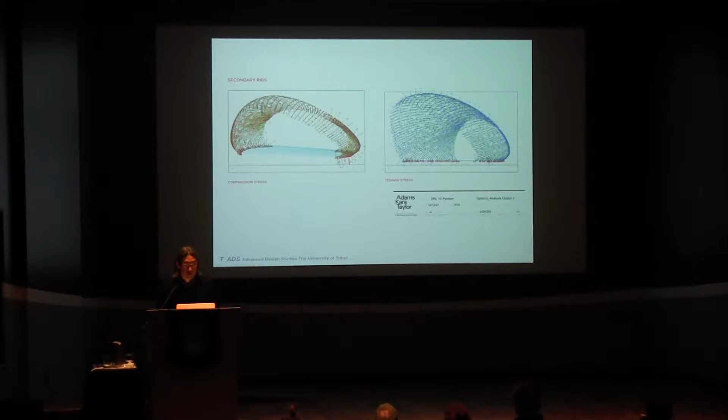In this case, this design was done by a graduate of the AA, and the students were asked to put together this building, or giant model, in about 3 weeks. We also collaborated with a structural engineer, Adams Kara Taylor.

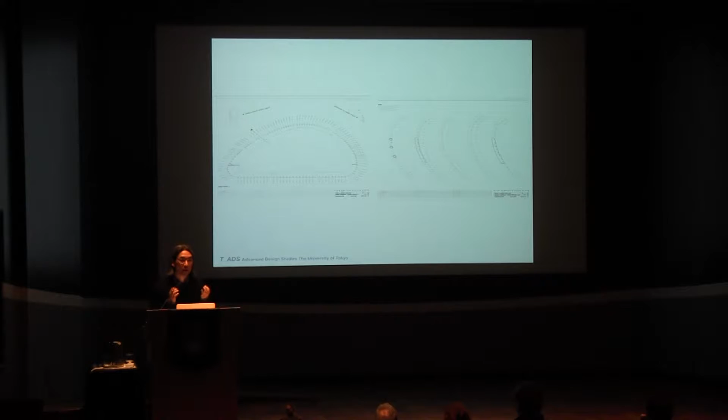Let me just quickly go through. The point is we fabricate and design it just like we're going to make a little tiny model. It works beautifully at model scale, but when students tried to put it together, we thought we could finish in 2 weeks—in fact it took us 3 months.

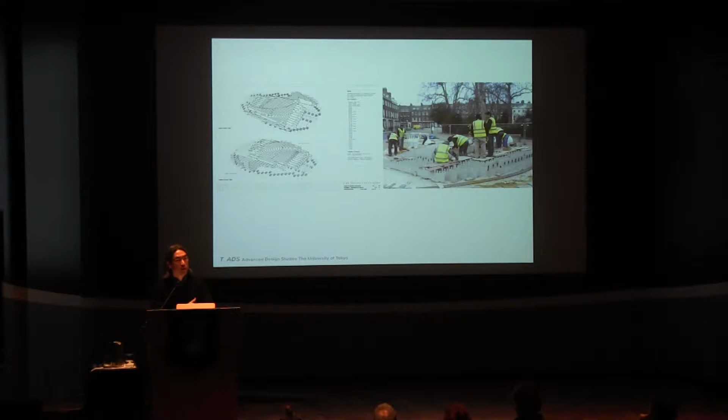In the meantime, students couldn't do anything because it was their spring break. I said, okay, let's put it up during spring break, but it ended up taking a whole semester to put this giant model together. So this is the contrast between the model, which took half a day, and this one.

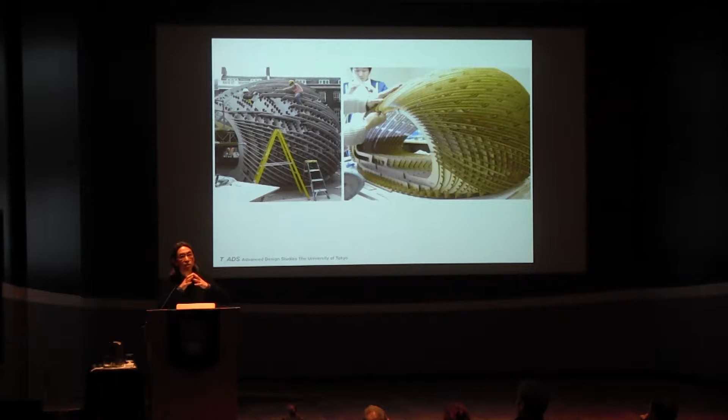So what we learned from this whole possibility of digital fabrication is that it works really well geometrically—you can optimize structure, and it's cost effective because cutting a straight line or a curved line costs the same. But there is a discrepancy between the accuracy of machines and the accuracy of humans. This could be a problem, or it could be an interesting place to work on.

So when I came to Tokyo in 2010, I thought, why don't we use this discrepancy as a point of departure for a series of research? Instead of humans being the ones constantly making mistakes, why don't we develop a system that absorbs all those discrepancies?

The first one I tried was using shrink wrap, like the plastic on drinking bottles with labels—when you heat it, this plastic shrinks. So the material has an ability to adjust for these differences and discrepancies. In this case, it's creating minimal surfaces that also work structurally. Very crude.

The student can build this by hand, but the structure doesn't depend on accuracy of all the parts. Rather, the material has an ability to adjust its size. So you can see the students heating the material to make very taut structures. But the first one was very crude, and there was very little control over the geometry.

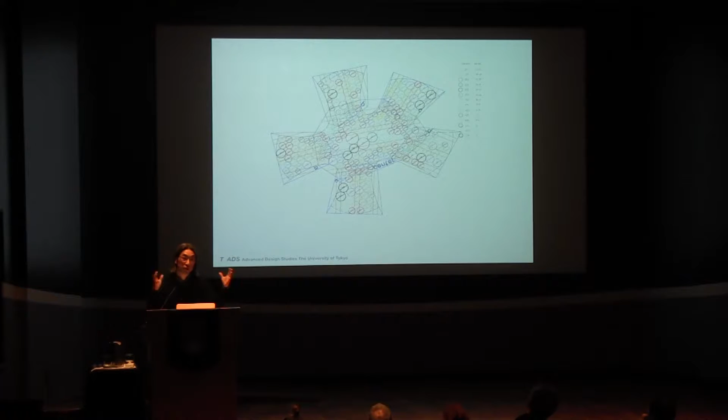So in order to have better control of the output, instead of a giant frame, this time we use a series of circle packs made out of bamboo. In this case, if you want to control the geometry, all you need to do is control the shrinkage. The smaller the shrinkage, or the larger the shrinkage, generates the geometry. So once again, it's about using this loose fit between geometry and accuracy. In this case, the material is the one making all this adjustability possible.

I was talking to Toyo Ito, the architect in Tokyo. He said something very interesting, that he thought more advanced computational use of design makes it easier at the construction site, because everything is perfectly designed and all you have to do is put it together. Perhaps less skilled labor can perform those complex projects because of that support. But in fact, it's completely the other way around. The more computationally advanced the project, the higher skilled laborers are required. So there's an interesting discrepancy here as well.

So with that, this is the first project I worked on together with a construction company, Obayashi Corporation. I made a pitch with this construction company because they're facing a situation in Japan where the population aged over 60 will be about 40% in about 10 years.

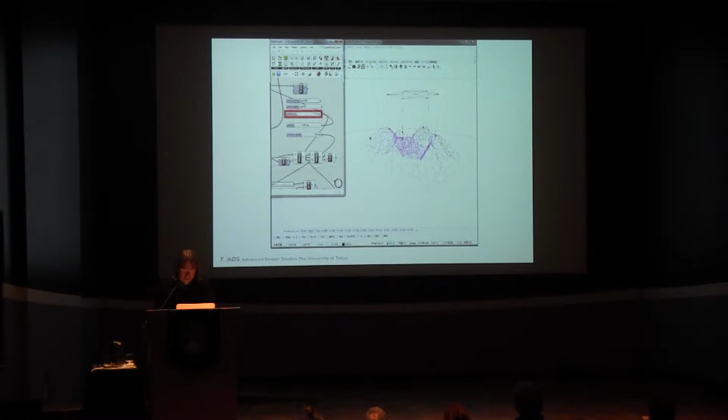Let me quickly go through these as well. In order to test it, this is a 1 to 5 scale model within our laboratory. All of it could be collapsed, brought to the site, and then lifted finally with this crane. A very simple kind of stitching of these seams allows the geometry to be very stable.

This also requires very precise lengths of these components put together by a series of cables. So once again, everything is quite manual, but the manual labor is being supported by digital fabrication. In this case, it's creating a jig, from the diagram and the fabrication processes.

These are dynamic systems where we have to make the structure - once again, the strength is not based on the material, but based on the geometry. So all the dynamic forces needed to be calculated. I'll skip that. So, as I was talking about, the geometry pulling down towards the middle allows all those components to be balanced and become quite stable in the end.

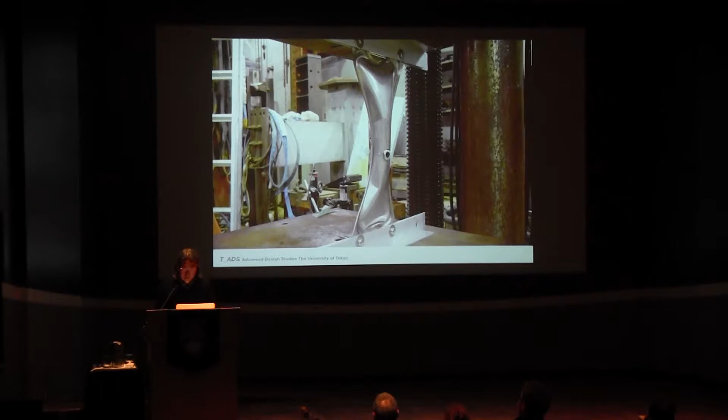Some of the structural calculations, working together with the structural engineer, Jun Sato, who does most of his work for young upcoming architects. Within our structural lab, we had to crush many of those. It's very thin, as I said, very thin stainless steel, but when you inflate it, it becomes like a pillow that becomes a compressive element. Here's a video showing the fabrication and assembly processes.

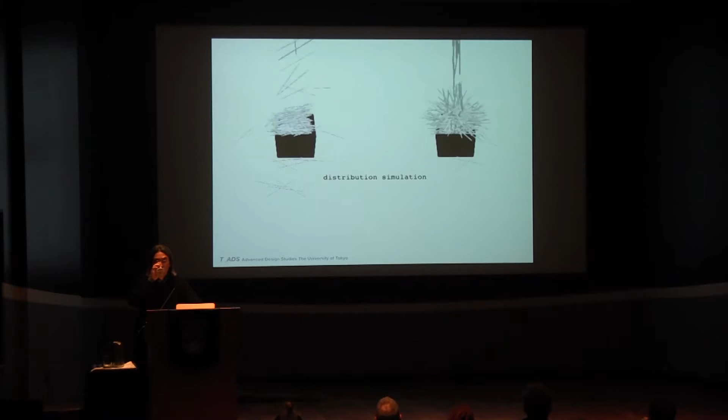The basic component for the system is a simple stick with a square section. However, by controlling the way these sticks are distributed in large quantity, we can observe emergent logic in the way they form structures.

We have found that the structure does not have a specific breaking point. It distributes a series of local failures while remaining intact as a whole. The scanning system monitors the stick structure, sending data to the network, which is compared to the digital target geometry in real time. The network then feeds back to each distribution node, acting as a guiding system, allowing stick dispensers to work collaboratively to function as a single large 3D printer.

So instead we take everything out - we thought, why don't we develop this feedback in the real-time scanning system so that when people make a mistake, it's not a mistake, but it just needs to be recalculated for the new targeted geometry. The new target geometry also needs to be rescanned with the structural analysis. So these are the kind of monitoring to see how the geometry is constantly changing, but the mistakes are always being adjusted within analysis of the structural development.

We saw that in the video. It's an interesting thing - this professor was wondering how do you make a strong and safe building, but at the same time it doesn't have so much weight. Because in Japan, in order to make a safe building, you have to make a span of concrete, and it oftentimes becomes very heavy. But when the failure of those buildings happens, the disaster is multiplied. So lighter buildings perhaps have less potential for disaster consequence. So he's developing this whole idea of a porous, lightweight structure that's very strong, and chopsticks seem to be, at this point, the right answer.

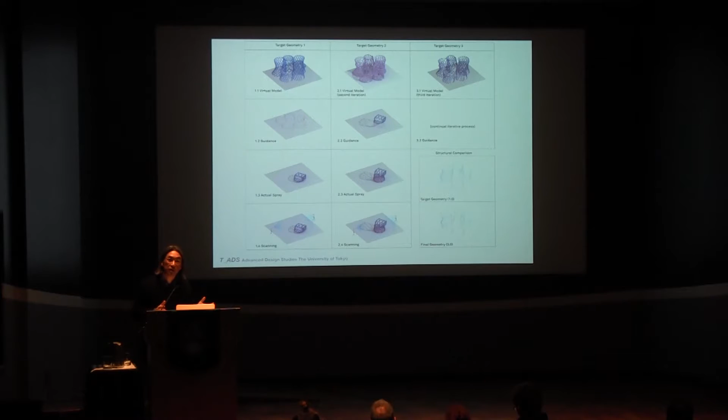And the final geometry is close enough. Structurally sound, everything is fine, but slightly different. Is that a bad thing, or is that a positive thing? So we thought it was a positive thing that we can differentiate each time we make.

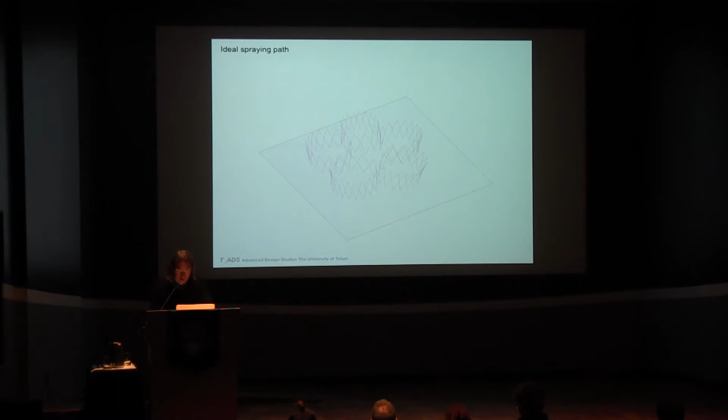So this is a quick sequence. Here's an idealized spray path. Of course, the student makes it slightly different. So we scan it, correct it.

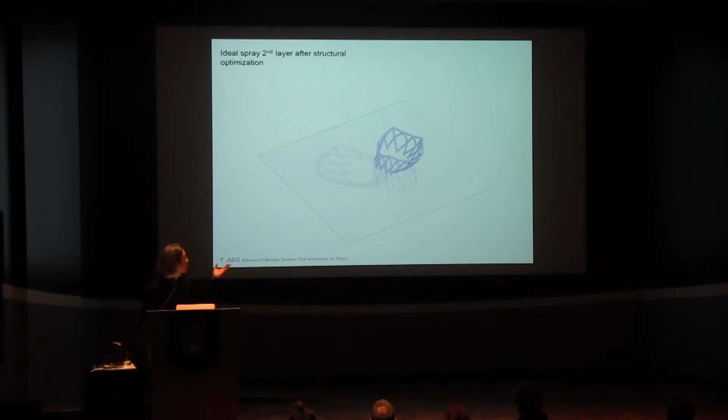And then because this time we learned that in Japan, over 2 meters above, you have to have a license to do a construction process, students are always working on the ground, and if they have to go up, we have to hire a contractor to do it. So in this case, we reversed it to say, why don't we use a light material? This is another reason that we chose the spray foam.

But we built on the ground and lift it up, so that we can constantly work on the ground, but that would create some more inaccuracy in the process because you have to lift it up each time.

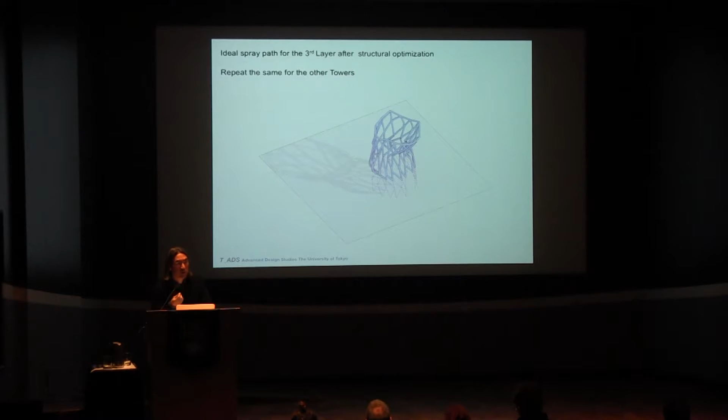So this is the left, on your left, that's the targeted geometry, and the right, that's what we printed through the movement arm of the student. And the structural analysis, as I said, doesn't happen before or after, but throughout the entire process is continual scanning and also analysis taking place.

So here's some snapshot from the night view. I'll show you the video once again of this whole construction process.

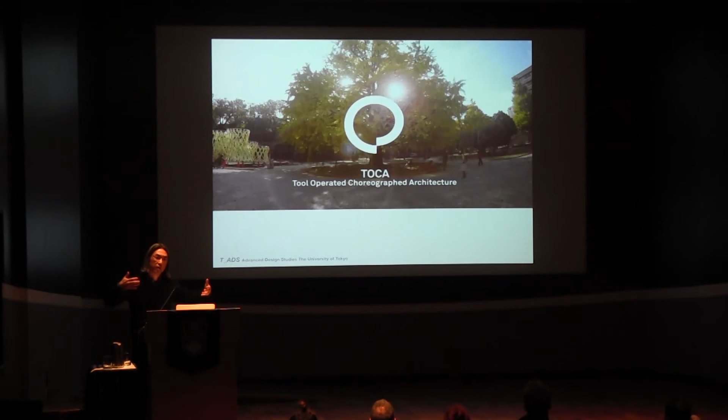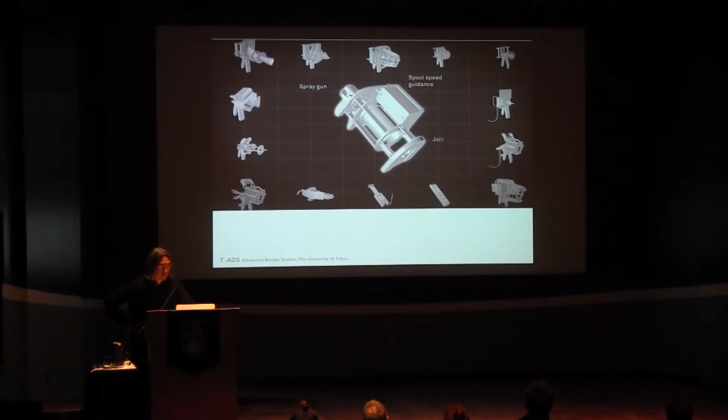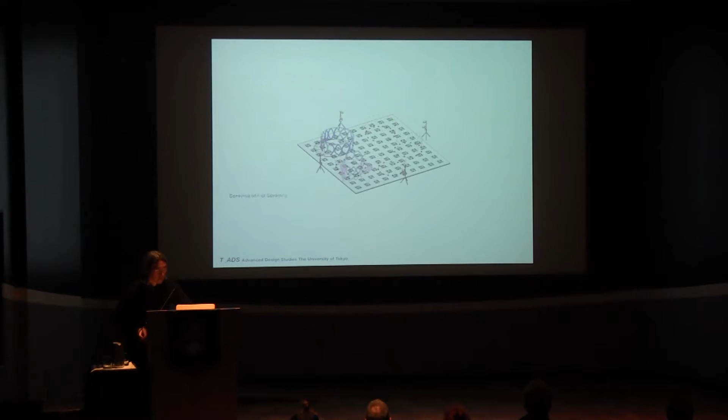It's a TOCA, because we thought, how do you make a construction process like a dance, right? The person comes together in the print. This time, instead of projection, we use a QR code so we can see during the day. It wasn't as smooth as what we imagined, as you can see.

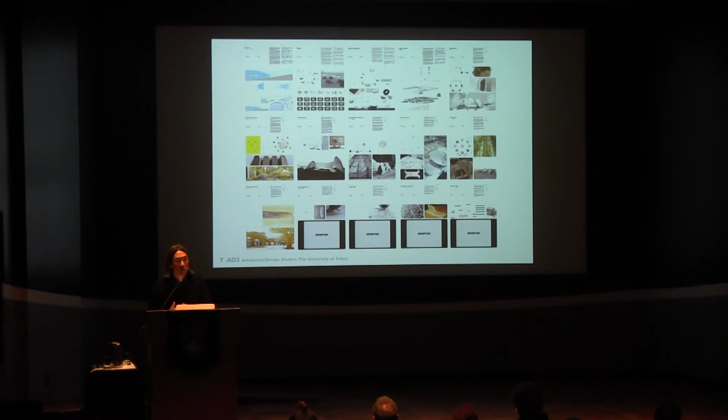So we explore whole different ideas - materials that are not considered architectural materials. I'm going to show you some samples, like wasted coffee ground, or paper which is perhaps more known for recycling, but not architecturally, or something like hair. When you go to beauty salons or barbershops and get a haircut, what are you going to do with the hair if it doesn't have any architectural possibility? So students are wandering around to see how we rethink about material and how we maximize the material available in the city, where materials are being produced rather than only consumed.

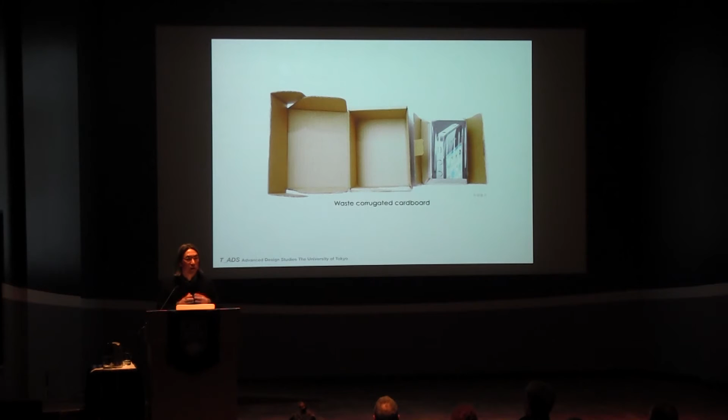Quickly going through, this is called digestive architecture. Internet economy really produces a new type of material distribution, and the output of this is cardboard - you buy something on Amazon, there's a box within a box within a box, you always get cardboard all the time. And this is actually a Canadian study - students are looking at cardboard as something the city produces all the time. Can we do something without turning that into toilet paper?

In Ontario's Agriculture Department, they studied that cardboard can be replaced for cow feed - as long as 40% nutrients are provided in addition to the cardboard, the cow can sustain perfectly healthy. And we thought, what a great idea, that we can turn the cows into this whole material transformation process.

Architecture in this case happens not only from cardboard back to raw material and then ending up as toilet paper. Here it's a tree that provides the material, but instead of going through an industrial process, it goes through an agricultural process. The cardboard is used as feed for cows, but what a cow produces is cow dung. You can turn the cow dung into fertilizer, but there are enriched fibers in it that we can turn into brick, and the brick becomes architectural material. If you don't fire it, it becomes raw material again.

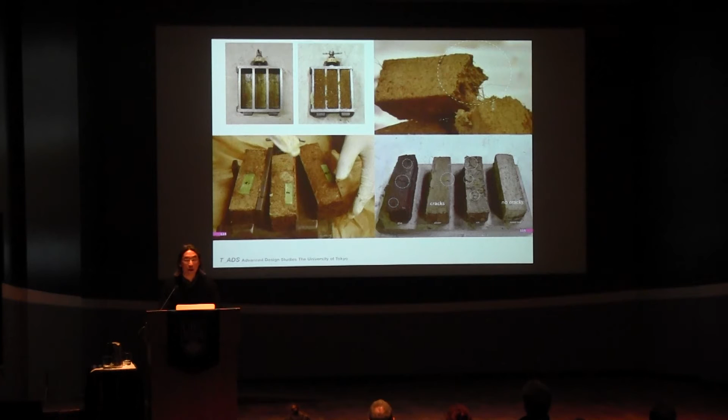So you can produce this material cycle: from cardboard to feed for the cow, and the cow produces an architectural building material that you can use for making temporary buildings, and in the end you bring it back to the farmland where it becomes fertilizer again. So the students actually got cow dung and made their own brick, testing how much fiber it needs in order for it to become a sustainable product.

So you can imagine what our studio smelled like.

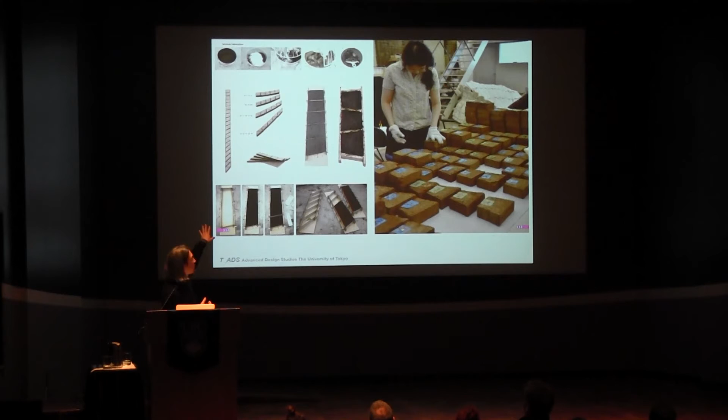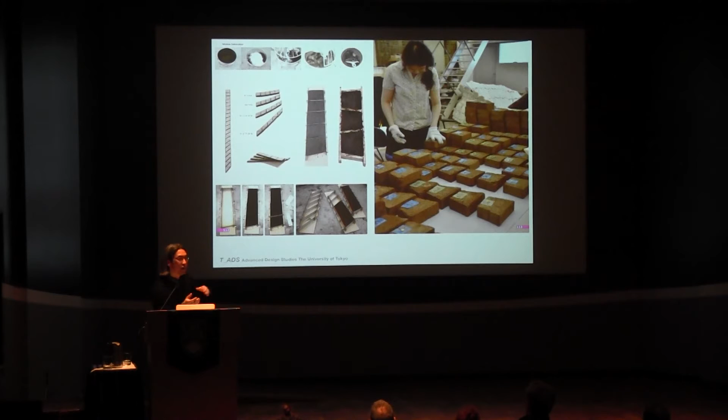What you're looking at on the left is what they do in the first year. It's about whole geometry, how to put together different types of material through one single production process that produces various different components. Depending on how you put it together, you can control the outcome. It's a kind of reverse engineering: you want a particular output, find the curvatures, and stack them in a puzzle in order to create some geometry in the end.

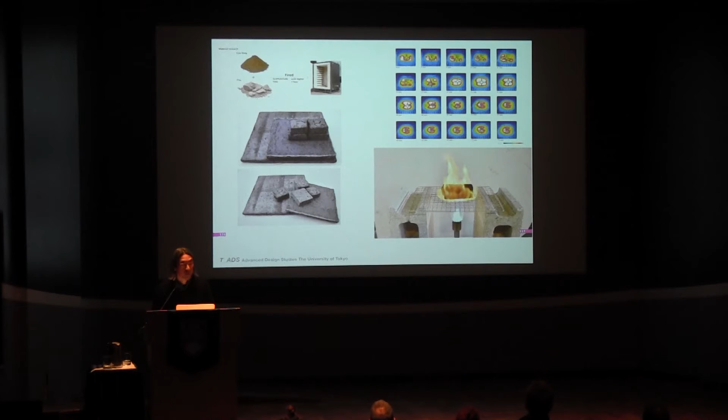Or if you fire it, it becomes something used in places like India and elsewhere as fuel for kitchens. So it's not only about going to fertilizer, but you can also turn it into potential emergency fuel. These are the kinds of things they do in the first year as a geometry study, but the geometries are also tied back together with the material system.

In this case, it's how the city produces a particular material that works in a larger agricultural as well as urban system. The final proposal for the student was to create a farmer's market used only in the summertime, where all the material from the cow dung is used, then goes back to the farmland in the wintertime, and the cycle produces again.

This is another project. Typically cities are quite polluted, and the more construction takes place, the more toxicated or polluted the city gets. So how do you reverse this concept, so that perhaps the more buildings that are built, the healthier the soil and the healthier the ground will be? Is that possible?

This project generates a brick from material at a gas station. In Japan, gas stations have a maximum license of around 25 or 30 years, and in order for the license to be renewed, they have to take all the soil out, clean it up, and put it back in before running the gas station again. Nobody does it because it's too expensive—typically they just put the soil back and put the building on, and nobody knows what it was before.

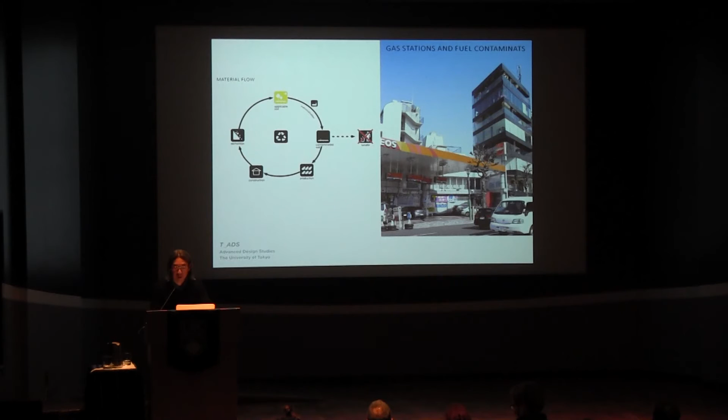Once again, these are student projects that generate a geometrical system while also dealing with a city issue—in this case, how to deal with polluted ground. Similarly, the geometries are put together in a very simple way, but they're all differentiated. If you put them together in a certain way, you can control a particular outcome.

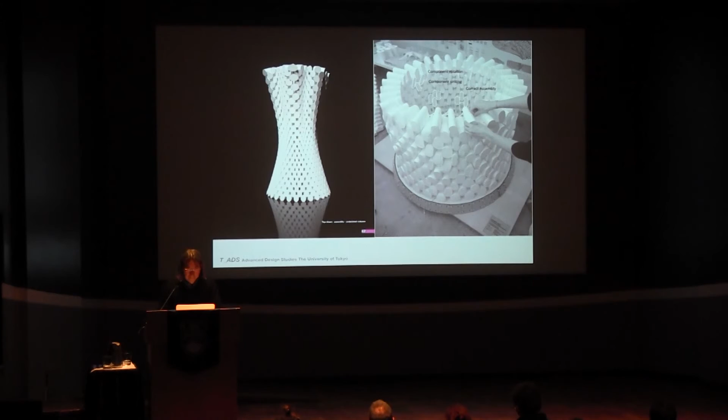So those are the geometries they can produce, also the system.

The proposal is to work at a construction site, let's say a post-gas station construction site. They dig out all the soil, pack it into a series of trapezoid-shaped bricks, and create a pavilion. Meanwhile, the pavilion will detox the soil, if you like. After half a year, the soil becomes clean, and you can put that soil back in, basically demolish the building and put it back. So the architecture exists within this material transformation process rather than architecture always being an end means.

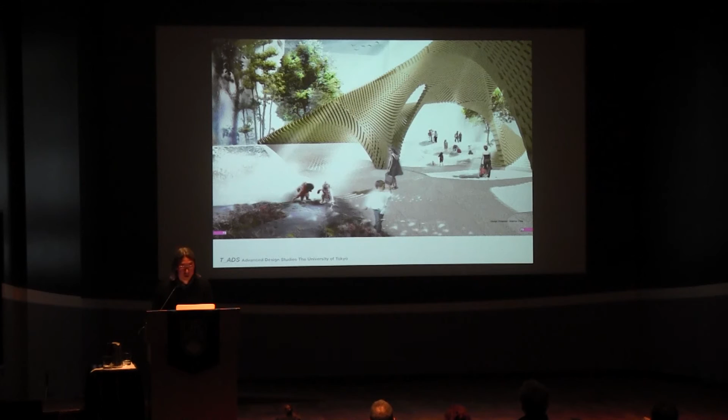So here's some of the proposal. Now, the last images I wanted to show is this idea—a bit of a radical one. We didn't even know what to do with it at the very beginning.

Coffee grounds—everybody drinks coffee, but we don't think twice about the potential of coffee ground. It has incredible properties: it's fire resistant, it absorbs odor, produces aroma, and repels mosquitoes. Can you actually network all the coffee shops in Japan, in Tokyo, to collect it all and produce an architectural building material? That's what the student tried to do.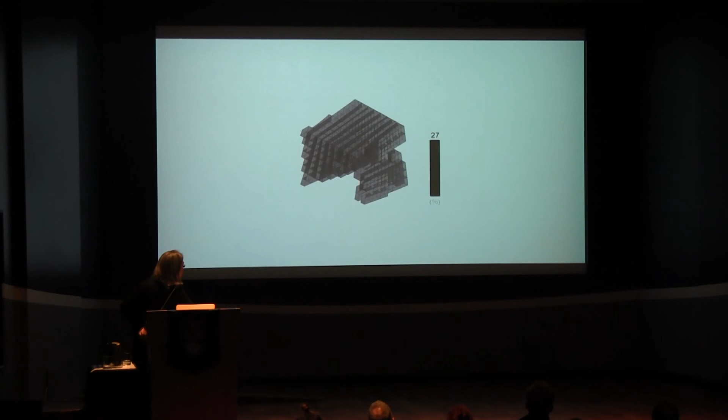Olfactory optimization seeks to gather aroma particles to create the atmosphere. Visual analysis organizes the porosity of components to create a network of visual connectivity. Coffee ground is hybridized with a wood frame to help control the overall form. Coffee composite combines coffee ground, vinegar, agar, and water to create a lightweight shell material. In the drying process, the component can warp from a flat domain into three-dimensional forms by shrinking. We can pre-program the movement of the component to let it adjust itself when connected into a weaving structure.

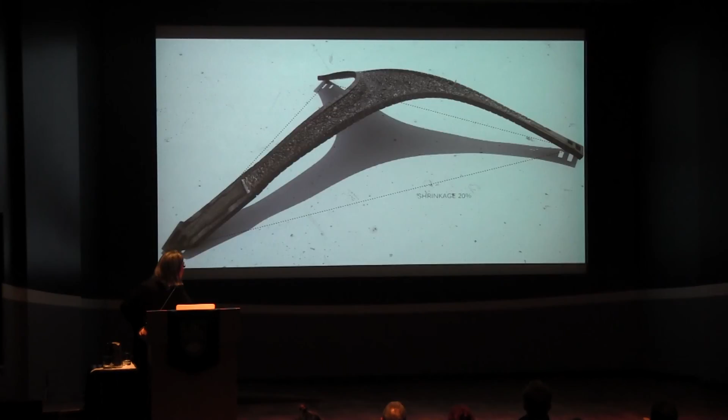Intimacy Cloud is a material-driven architecture. More material consumption results in further progress of architecture construction. Okay, with that, I'm going to leave it here. Thank you.

If I add the very last point: the context is a downtown Tokyo area that survived World War II. Roji means very tight alleyways—a very interesting neighborhood. But because fire regulation mandates that all the buildings be demolished, they put up one of those high-rise buildings instead. So the reason for demolishing is fire, and the question becomes: what different material, rather than concrete, can we use that's fire resistant?

So coffee bean became the driving force for generating a project like this. People also realized these are interesting places for very Japanese, detailed craftsmanship. So coffee isn't just a cup of coffee, but excellent, all kinds of exotic coffee they make. So culture, urban issues, and local residents—how you synthesize those—not only through design proposal with ideas, but also digital fabrication, in order to make those projects possible. Thank you.